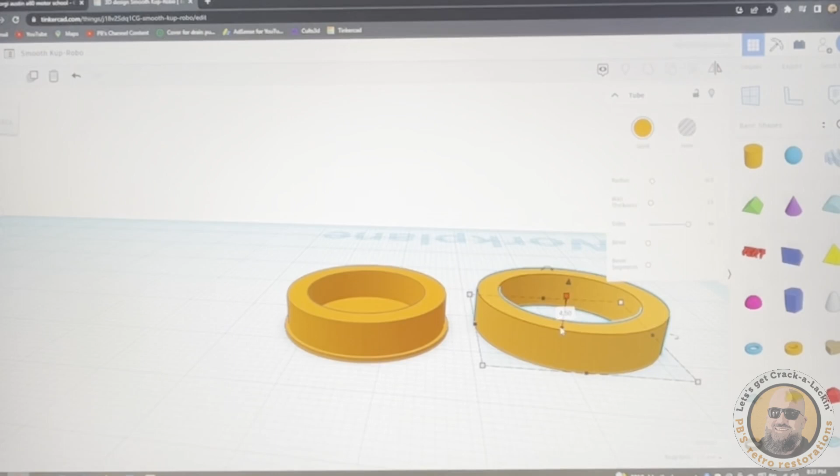Okie dokie, so like I mentioned before, you cannot get replacements of the red wheel that turns the front wheels for this model. Well, I saw one that was cast in pewter, if you can believe it, but getting it to Australia is the usual $2 part, bazillion pounds in postage story, so I gave that a miss.

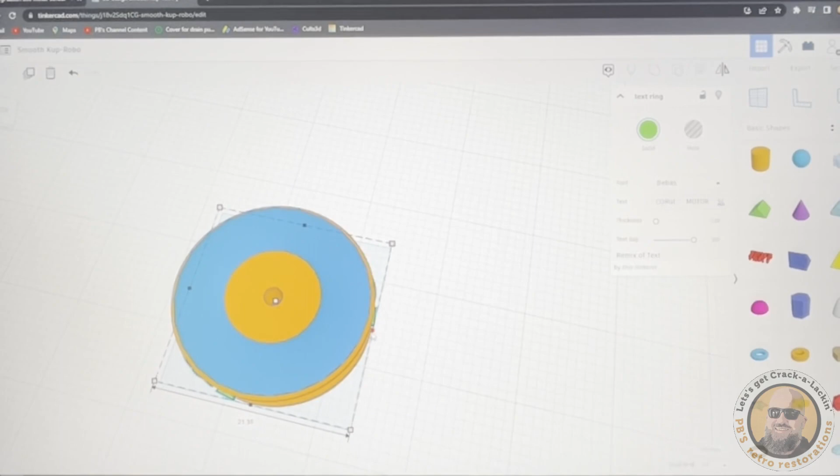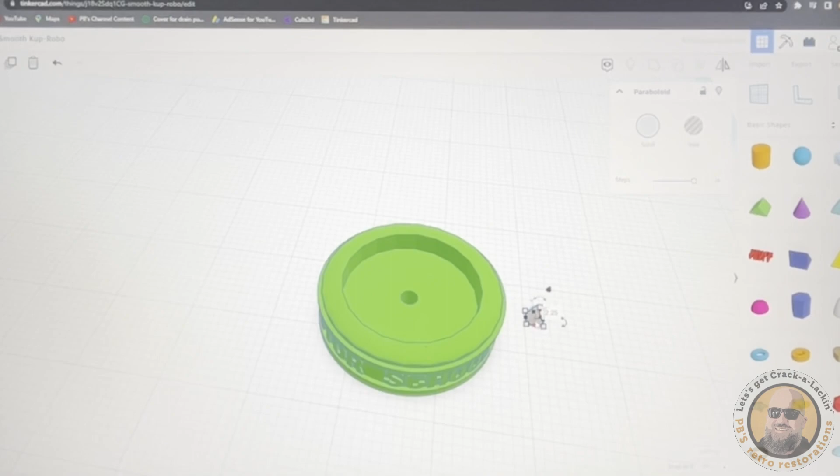Now, I suspect the reason a reproduction part isn't made is that for the hundreds of these things I've seen online in various states of disrepair, they nearly all still have this part in place, so there probably just isn't a market for them. But that doesn't help me, viewers, does it? No. So I turned to my two newest and most bestest friends in the entire cosmos, Tinkercad and my Anycubic 3D printer.

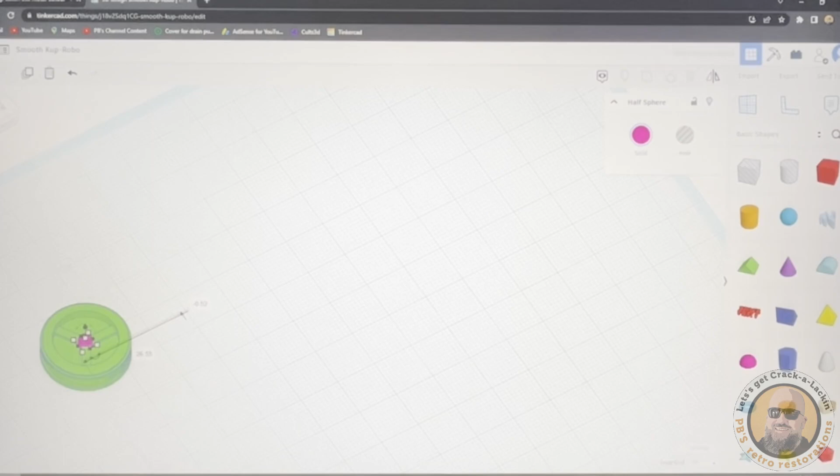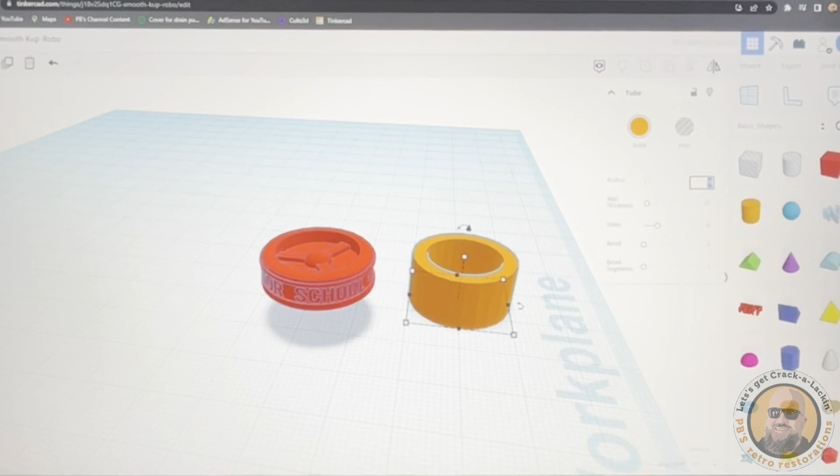I really feel like I'm getting the hang of using Tinkercad to design parts for 3D printing. I'm limited to what I can make using relatively basic shapes like squares and tubes, but this part's an excellent candidate for that because it's pretty much what it is.

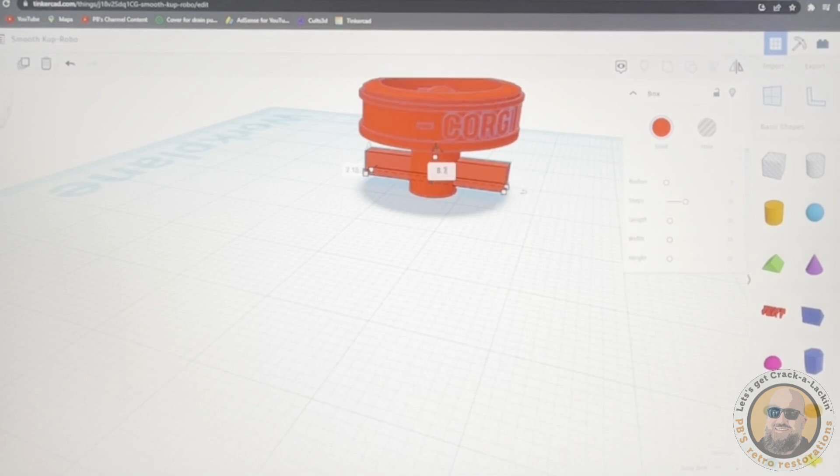I didn't have an original piece to get accurate dimensions off, so I had to compare images on the interwebs and make guesstimates on the size. Make no mistake, viewers, this took me a good hour or two to draw up, but it looks pretty good. But the proof is in the printing.

This is the first print being test fitted, and I'm pleased to say it went in like it should. It was a touch tight, but it was okay.

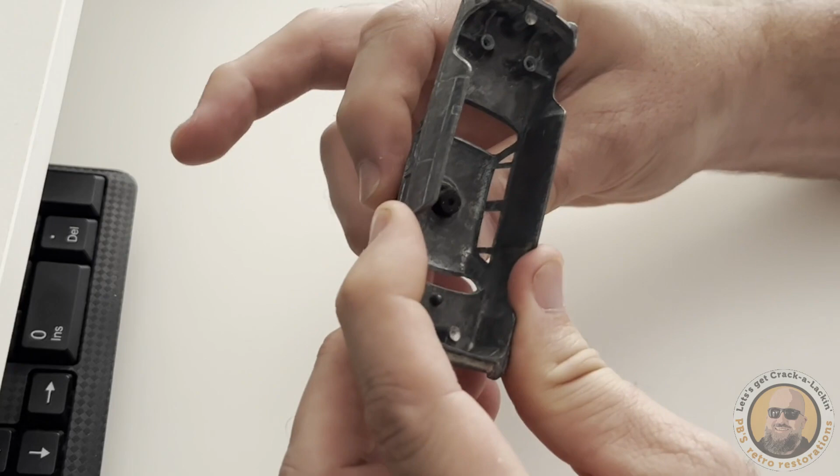On a complete test assembly with all the parts, I found the hole underneath for the metal shaft was too small. I'd made no provision for the keyway on the end of the shaft, so I was back to Tinkercad for some adjustments, another print, another test fit, and we were good to go.

I'm going all Martin Dare this week and using a brass hand brush here because I bought a couple of wheels for my Dremel, but they were stainless steel ones, and they're a little bit brutal on die cast. They do more harm than good, I suspect, but anyway.

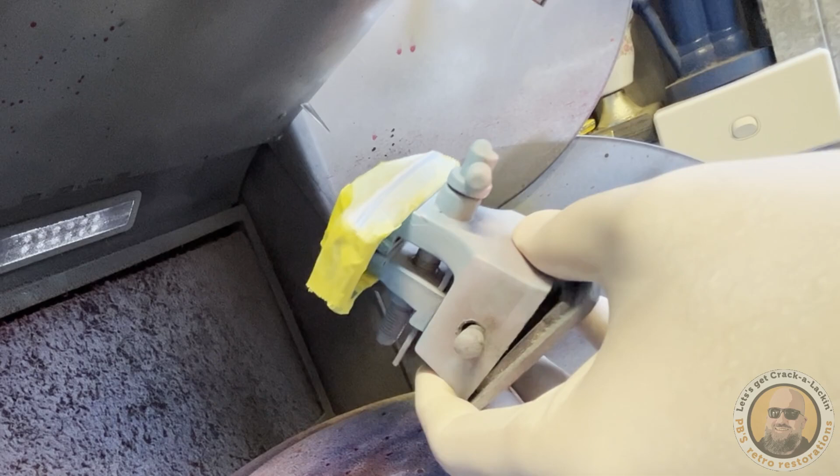As usual, I've made my own replacement L-plate decals. I think I should have made some license plates as well for it, but I didn't this time, and oh well, there's always next time, right, viewers?